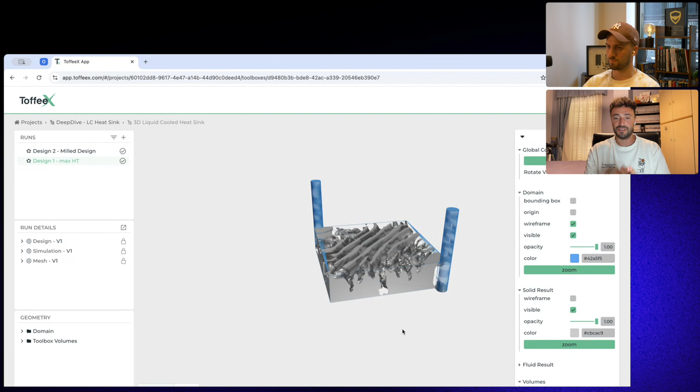This doesn't necessarily mean that the product that comes to life in the end is bad. The product at the end of the design cycle will also meet the requirements, but maybe it's not the optimal solution. It's also not the most sustainable solution in a sense. So this iterative process is what we are trying to address and to solve with ToffeeX.

So that's why we are trying to propose a new way of designing, which is transforming the approach engineers will take moving forward. We don't want people to spend time doing countless iterations before they get to a design which is performing as expected. We want them to be empowered to just make high-level decisions.

So they should be thinking about, I need a component that is performing this and that. I'd like to dissipate that much of electric power, for example. I'd like the pumping power to be this low. And then it's up to the software to come up with the right solution.

So if we have to find a spot where I should place ToffeeX, it would be exactly in between a CAD and an analyst team inside the company. So we are exactly in between these two teams. We are not replacing either of them. We are just giving them more tools and more possibilities to come up with more innovative and efficient solutions.

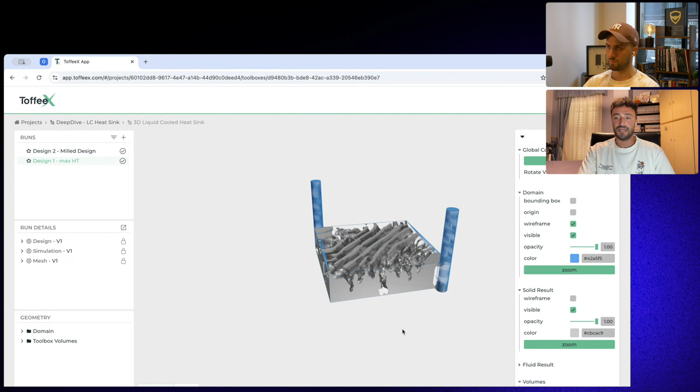I probably said a lot of words, but maybe showing that in a live demo is more efficient. So I will share the screen so I can show you a live demo of the software and guide you through a setup process, so how you would design a component using the software instead. Let me know when you can see. I think it's already live. Yeah, I can see it.

Okay, so this is our web interface. ToffeeX is a cloud-based platform. The way we define what we do at ToffeeX is physics-driven generative design. This means that we are using physics simulation combined with topology optimization to create optimized components.

We do all this in a cloud-based platform, and that's because we believe that the cloud is probably the future moving forward in engineering. It's a good way to hand over the computational resources not to a local HPC cluster, but to something in the cloud. So more companies can adopt these tools and join the new trend with engineering design optimization.

So after logging into the platform, this is what you will find. This is our home page, which is also what we call the project page. As you can see here, we have a list of different projects. They can be thought of as folders. Fundamentally, inside each of these folders, you will find all the tools that you need to carry out a design optimization.

As you can see, I already have created a new project for this deep dive session, and I'd like to show you how to set up the optimization for a liquid cooled heatsink, which is a classic application, and it also shares a lot of commonalities with other thermal and fluid management devices. In general, when you want to start new, you will simply need to click here, create a new project, give it a name, and you're good to go.

So the domain that we have uploaded is fundamentally a triangulated mesh file. The input that typically needs to be provided into the software is an STL file, which can be exported out of any CAD system nowadays. Here you can see it's a very small geometry, smaller than 5 centimeters per side. So it's a very small liquid cooled heatsink to cool down a CPU.

What we identified here are a few basic regions, a few basic surfaces that will be used to set up the physics simulation problem. As I was mentioning before, the software is physics driven, so we need to describe the physics to tell the software how the part is behaving, how it's performing, and to inform the optimization process to go into the right direction.

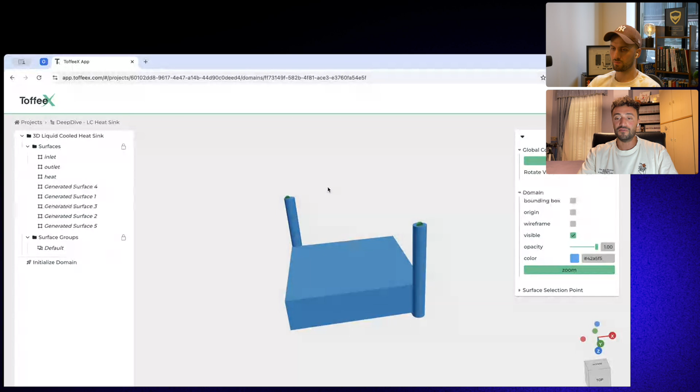In this case, what we had to do was to define an inlet region that you can see here, with the surface being highlighted, an outlet region on the other side, and then we also specified the region from which the heat is applied. In this case, the power coming from a CPU.

Once we have defined our domain, we go back to our project page, and what we have to do is to build a toolbox. A toolbox is what I would define as the main operational environment within the platform. It contains all the tools that you need to perform either simulations or design optimization. To start, it's very simple.

You click on Create a new toolbox. You can give it a name, so let's call it Deep Dive Toolbox, for example. And you select the domain that you want to use to run this design optimization. Here you have some physics models that you can select. In this case, we will be solving both a thermal and a fluid problem, so you can select thermal fluid and click on Create.

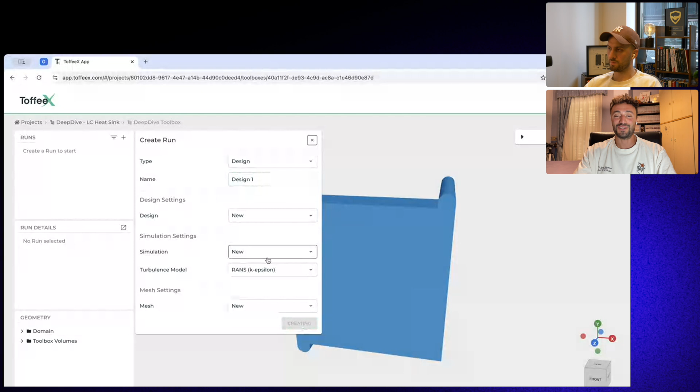I don't want to take too long to show how the creation of the toolbox and of the optimization works, but fundamentally what you have to do is to create one run, which is a design run in our case, because we are expecting the software to output a design at the end of this process. Classic things, we can give it a name, we can set up settings for design, simulation, and mesh. Because again, the software is simulation driven, so we need an underlying physics simulation to inform our optimization process.

Once you click on Create, here on the sidebar you have the option to fill in the run details, so all the parameters that you need to input to start the optimization process. At the end, once everything is set up, you will be able to perform an optimization. So just very quickly, I would like to show you how this works.

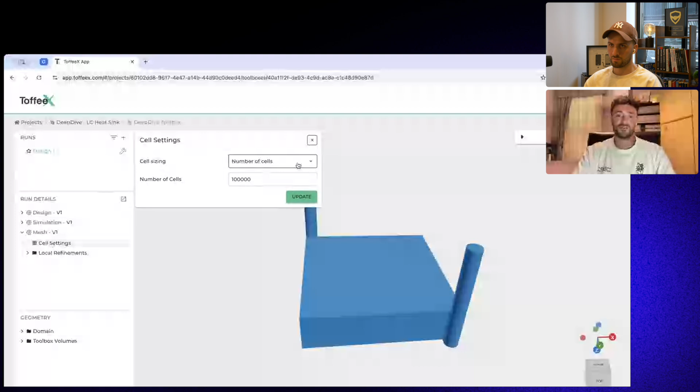So first of all, let's start with the mesh settings. It's the easiest one. Here we have to discretize our domain, so give it either a number of cells or a maximum cell size.

In this case, let's keep it to default, just to keep it with the basic settings. Under simulations is where we define our CFD. Here is where we are specifying all the conditions that describe the physics we are trying to solve. So first of all, for example, we want to tell the software what is the fluid being used in this case, so what is the coolant that we're using.

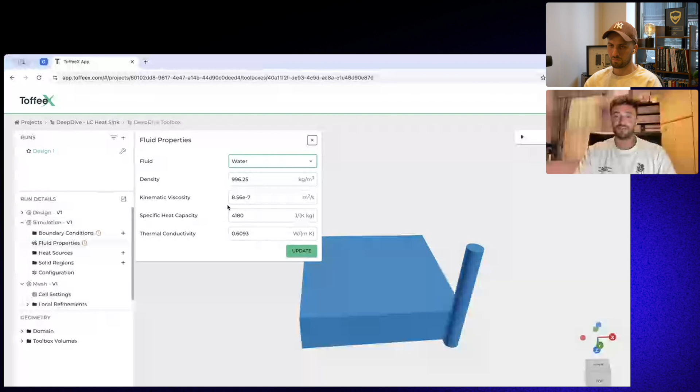As you can see, we have a list of predefined materials or predefined fluids as well. In this case, just to again speed up this setup, we will select water and click on Update. For the boundary conditions, what we have to do is to define the boundaries for the problem. So of course, we want to start by defining an inlet. Here it's very simple. We can define the boundary, specify the velocity of the fluid going inside our domain, the temperature of the fluid going inside the domain, and then once we have identified the patch, we can click on Create.

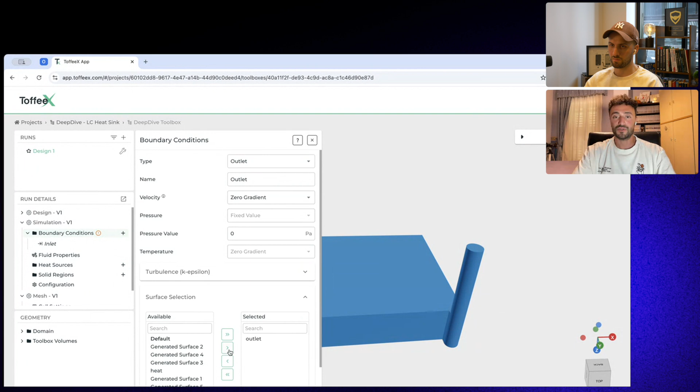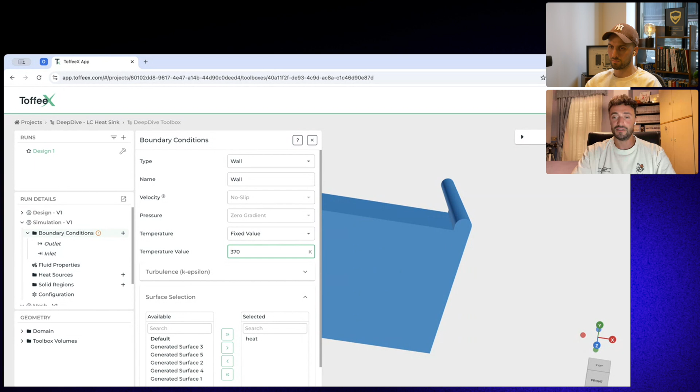This process is what we follow also for the other boundaries. So in this case, we will define a pressure outlet. Simply identify the boundary. Then we said that we are providing some heat, so we want to cool down this geometry. So what is the power we want to input? In this case, actually, I'm going to do something slightly different. Instead of providing a heat flux, as you can see here, you have the option to apply a heat flux, I will fix the value of the bottom surface that I identified before as heat, that you can see here, at a quite high value.

The reason is that this could be, let's say, 370 Kelvin to symbolize, for example, the maximum temperature that the CPU can withstand. So I might be optimizing in the worst condition possible, and then I can run the validations to see how this is behaving also for different working conditions. So this is one approach that you can follow.

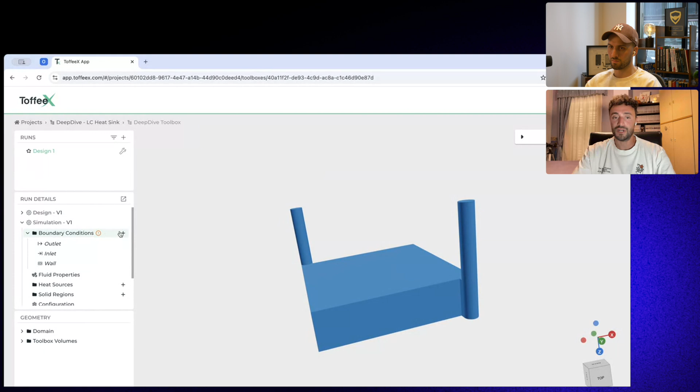The software is giving me this icon, so it's telling me that I still need to input a few more constraints, a few more boundaries. In this case, what it's asking me is to define the boundaries for the remaining surfaces of my domain. I will just use an adiabatic condition. So I'm making sure that the only heat transfer is happening between the heat provided into the system and the coolant that I've defined using the inlet here as a boundary.

Then we come to probably the most interesting part of the optimization. Here is where we define the settings for our design. As you can see, we have, again, a few parameters we have to always input for the software to successfully run a design. The first one is the material. In this case, we will be selecting a default aluminum and click on Update.

And then on the objective is where we define how the optimization should be carried out. As we were mentioning, Toffee is a software to maximize the fluid and thermal efficiency of a device. So what we want to combine is minimizing the pressure drops, so minimizing how much energy we need to pump the fluid through the system, but at the same time maximizing the heat transfer. These two objectives are in contrast: the more you minimize pressure losses, the less you can maximize the heat transfer, and vice versa.

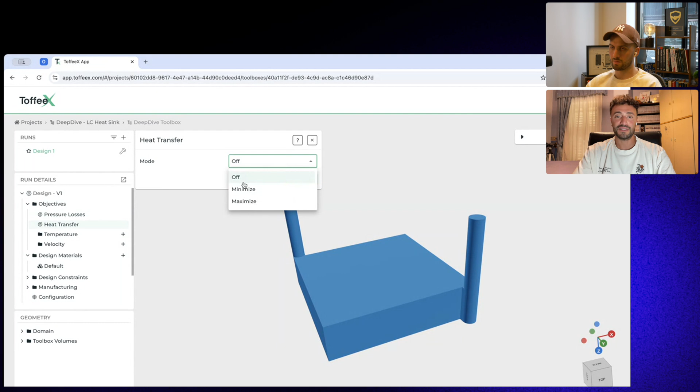So in this case, just to give a reference starting value, we will give two weights, the pressure losses and the heat transfer. We are telling the software that we want to maximize the heat transfer. I give it a weight of 500, which tells the software we want to give a higher priority on heat transfer in this case. This optimization is a bit more complex than this, but of course, I don't want to annoy you with a longer explanation. So in case you have more questions, please feel free to reach out at the end of this deep dive session.

One very interesting thing, of course, is that as we were mentioning before, Toffee started as Toffee AM, and then we transitioned to ToffeeX. So the first part of the company, Toffee AM, was clearly symbolizing a strong direction toward additive manufacturing.

So in the beginning, when we started using ToffeeX, the idea was to support customers or companies using additive manufacturing to exploit the freedom that could be achieved using that methodology to bring to life more efficient components. So the idea is that, okay, we have this great process, we have these great manufacturing capabilities, how can we exploit this freedom? But as we grew as a company, we realized that actually the market is moving in several different directions. So not all companies are adopting additive manufacturing.

So the idea is that we want to transition from AM to X. We want to expand it to extend our capabilities and also to open to, I would say, the unknown. So probably the X is symbolizing this as well. And we are opening now to several manufacturing processes. The idea is that we don't want people to necessarily change the way they manufacture, but it's more about adopting new tools to change the way they design. So the idea is that you have a manufacturing process. How can we optimize the output of this manufacturing process with a new software?

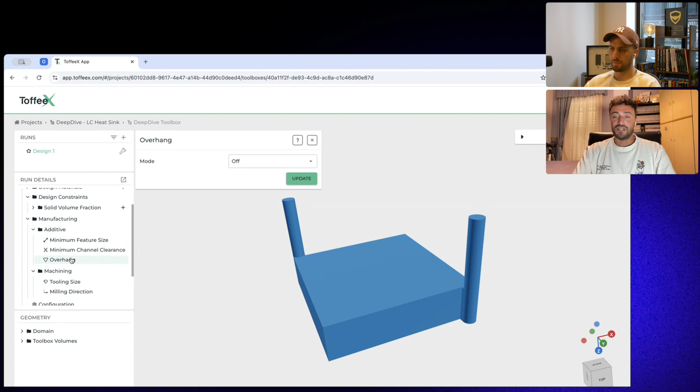So we know depowdering is something quite critical for 3D printing. And of course, overhang is probably the main thing. So we want to be able to specify a direction. So in this case, for example, we could identify a build direction going to the direction of the negative z-axis. So we could say 0, 0, -1. Identify the bottom region, which is the one that is supported. And then we could specify, for example, a minimum or a maximum overhang angle. So we know that at the end of this optimization process, the software will be not overhanging above the value we specified.

On the other side, we have machining constraints. So for example, we can identify a milling direction. And in this case, again, you can provide an axis to specify how the milling will be removing material from the block of solid that you are providing.

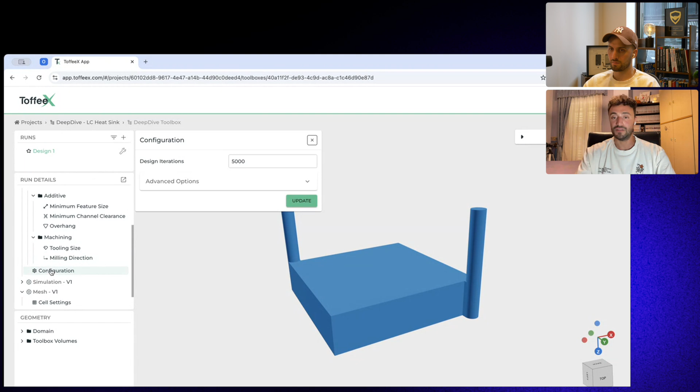Once everything is set up, you have a few additional things you can set up into the configuration, but very simple. You go here, you click on this icon, and you can select the computational power you want to allocate for the software to run the setup and to run the optimization. In the menu, you have here a few options, like select, for example, 8 CPUs. Again, these CPUs are not local, are not something you have to own. Everything is happening in the cloud. We are hosted on Amazon Web Services.

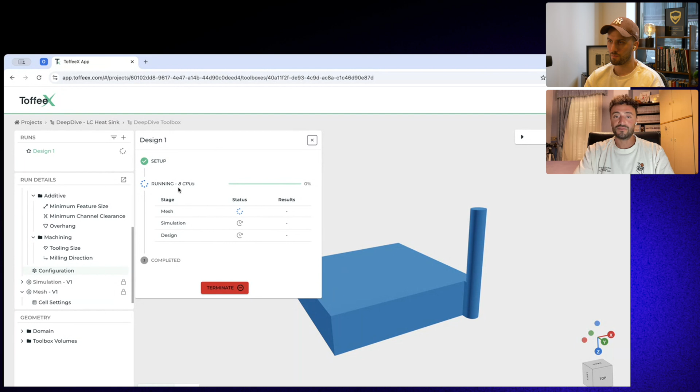And once you click launch, the software will give you this menu telling you that it's running, good sign. And then it's going through the different stages of meshing, running the first simulation to initialize the problem. And then we start a design phase. So you can also keep track and follow.

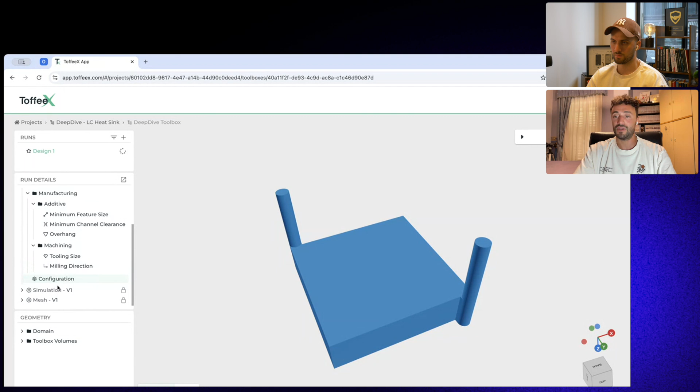Now, as you can see, it was very quick to set up an optimization. So we only had to provide a design space, in this case, just the overall shape of the space we have available for the liquid cooled heatsink. We have to go through the setup of a mesh, simulation and design settings. But what we are getting here as a result is a single design. Typically, what we want to do in this phase when we are exploring the possibilities we can get with ToffeeX, the best thing is to explore a variety of different settings and parameters. This is very quick and very fast to do in ToffeeX.

So, for example, here I have set up my mesh and simulation, and I'm happy with them. I know that the simulation parameters will stay the same throughout the different design stages, because these are my conditions, and I'm happy with the mesh resolution.

What I want to change is the design settings. So I want to test, what if I use a different overhang angle? What if I use a different minimum feature size? What if instead of additive, I go for manufacturing with traditional tools, so machining? What if I use less or more material? What if I use different materials?

So how can we quickly explore this broader design space? How can we, instead of making incremental improvements, start by generating a lot of designs, and then on the one we like more, keep iterating just to get to a better optimum?

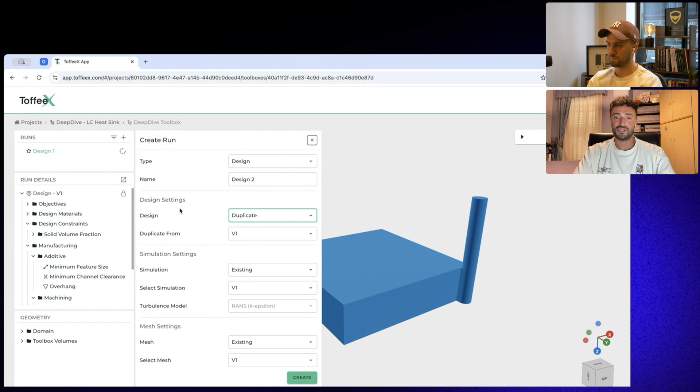It's very simple. What we have to do is simply create a new run, in this case again a design. The software will give us the option to select and reuse pre-existing settings. In this case, we will be happy to reuse simulation and mesh settings, while we want to change and duplicate design settings for the design itself.

I will click on create, and the software will give me a new design. As you can see, I won't be able to modify mesh and simulation parameters - they're fixed. So what I can do instead is change the output by using different design parameters.

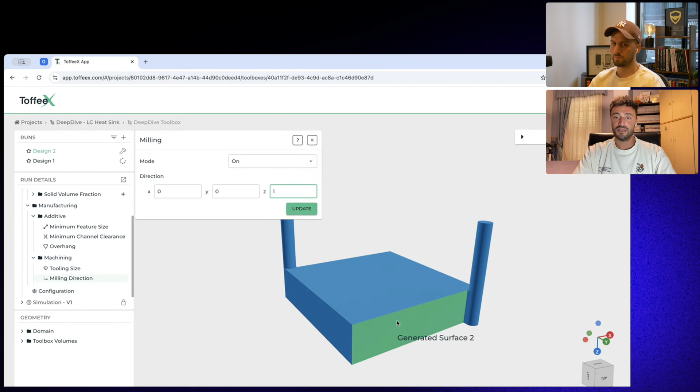In this case, let's turn off the overhang constraint, and instead enable the milling constraint. I want the software to remove material in this direction, so I have to identify the 001 axis direction, removing material from top to bottom, and click on update.

Very simple - I change one parameter. I go on the open file icon again and click launch. As you can see, the mesh before was completed, so the software is reusing the mesh settings.

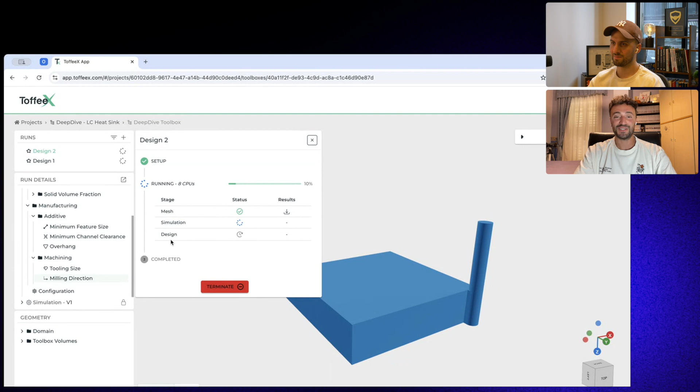Unfortunately the simulation wasn't done yet. Even if the software is very fast, it's not like a 3 second simulation. But then it's reusing the same settings to perform a new design. So you can see how it's very quick and easy to explore a design space by quickly changing one parameter and getting to a new design solution.

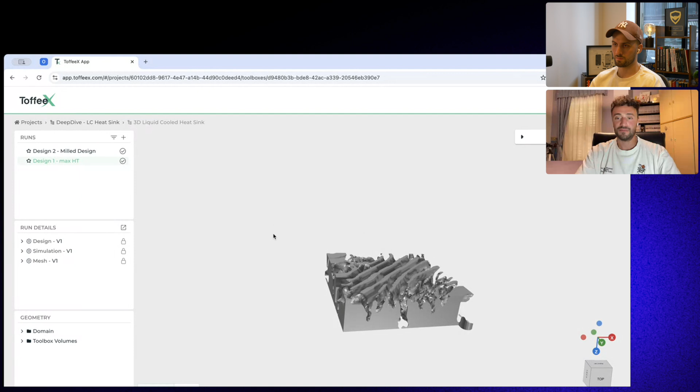Of course, I have already run some of these designs, so I want to show you the results. I'm probably going a bit longer on time than expected, but here we have two examples. One is the maximization of the transfer without any constraints applied, so you can see this is the structure the software gives as an output. This was the starting point we had, similar to what we've done so far.

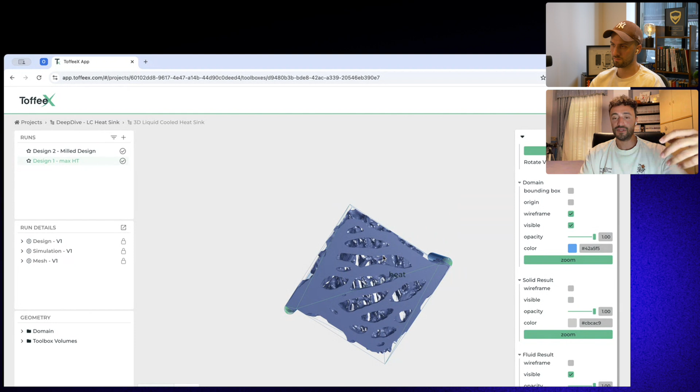If I go in wireframe, you will see this is the internal structure the software is building, and you can also visualize the fluid region. You can see how the software is splitting the fluid coming from the inlet to the bottom region where the heat is applied, to maximize heat transfer and cool down the structure as efficiently as possible. The result I'm showing you is without any constraints on manufacturing, so giving 3D freedom to the software.

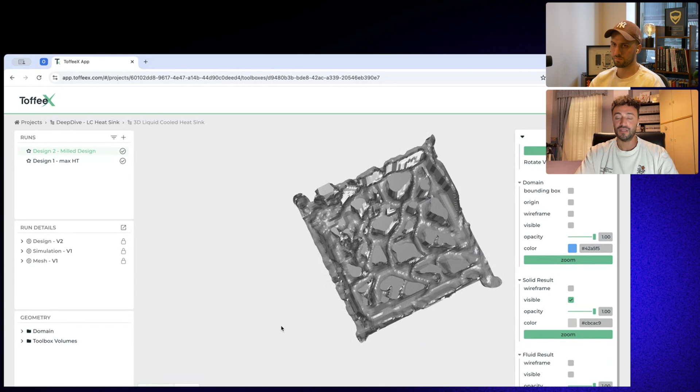But if we look instead at the design we got by milling, we can see that for the same parameters - same ratio of pressure losses to heat transfer - we have a completely different design. In this case, the software is carving out material from a block of solid, giving us a result which is at this point manufacturable by milling.

I would like to share these results very quickly in ParaView, which is a post-processing tool we typically use. So I might be sharing, again, the screen.

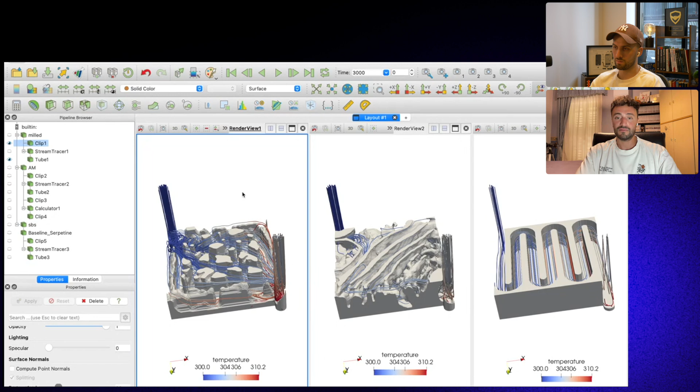If we visualize the temperature at the bottom of each of these devices, here you can see we have a maximum temperature of 311 Kelvin. If we go to the optimized region, which is slightly more unconstrained, we might expect a slightly lower temperature. You can see from the legend it's slightly lower, and if I rescale on those values, we see roughly 1 degree colder.

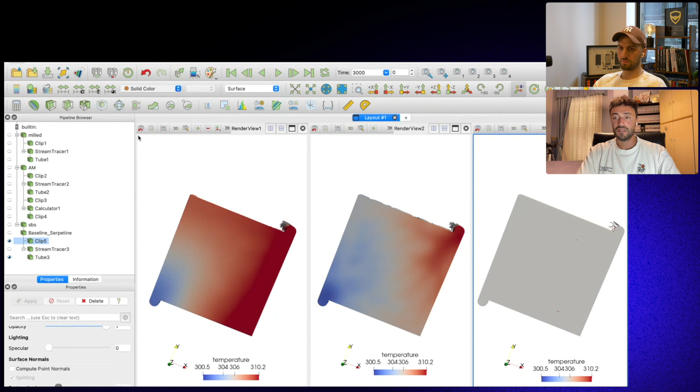Finally, we have the serpentine design. Again, let's plot the temperature for this one. Let's rescale, and you see 314 - quite a non-uniform distribution for temperature.

We can see how effectively the software is giving a design which is optimized, which is behaving better on heat dissipation. But if we have a look at the values for pressure, we see a similar pattern - for example, we have a value of almost 2000 Pascal. This is a small device, just to remind you.

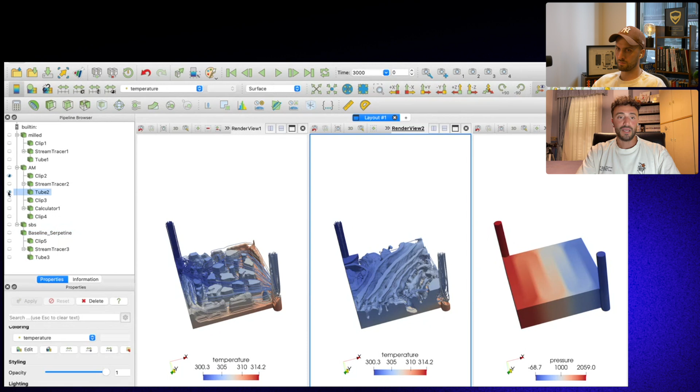In the AM case, we have a lower value of 243, and a similar value we are expecting also for the milled geometry.

So yeah, this was a pretty quick overview, but it's showing you the difference in the designs that you can get in ToffeeX very quickly by only changing a few parameters. You can tap into a very vast design space, so you can pick up several alternatives.

You are not limited into a design cycle which is incrementally improving on something that was either pre-existing or something you had to come up with from scratch, and then run a lot of validations to see what was working, what was not, and then slightly improve and modify until you reach convergence to satisfy the requirements. So this saves a lot of time.

In a few hours - if I go back to the software, you will see this design is taking roughly 1 hour for the set of parameters we selected.

It's really quick to get to different designs, different shapes, and then based on the results you get as a first iteration, you can also refine until you reach convergence where you are satisfied with all the results you're getting at the end of the process.

And of course, this is done not anymore in months, but just a few weeks. We have testimonials from customers going from conceptual design to actually manufacturing a design in 2 weeks. It's really powerful, and we believe it's a great tool to start integrating into the design workflow.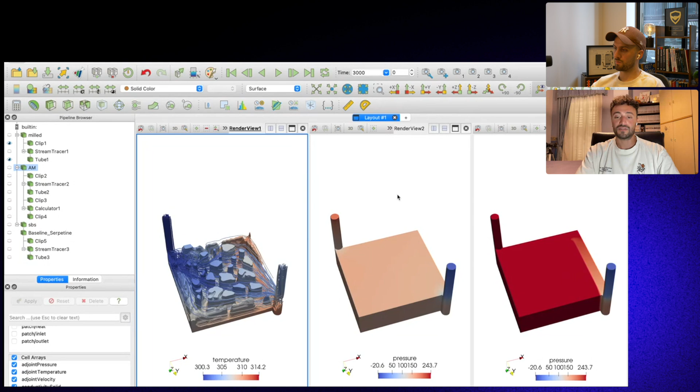Really good. So, yeah. Excellent. So now it's time for the questions.

We had one question from Ant in the comments saying, can ToffeeX provide design optimization for structural and FEA problems as well, or is it only restricted to CFD and thermal?

For now, it's restricted to CFD and thermal. We have constraints we can include to account, for example, for the minimum thickness of the part. This is something that maybe you know - your design can't withstand pressure loads unless it has a minimum thickness. That's something we can control.

However, we are not performing structural optimization. The main reason is that we believe our product is quite unique in what we do, and this is our main selling point and our main strength. There are so many players in the market doing structural optimization, and there is no reason to compete with them.

In our future vision, the reason why we will be starting to use and implement structural topology optimization is when we start thinking and looking at fluid structure interaction, to give a more complete optimization. But at this time, we are offering only fluid and thermal optimization.

I think that makes sense - also a strong positioning from your side to try not to be a jack of all trades, which is good. How can anyone interested in Toffee learn more about it?